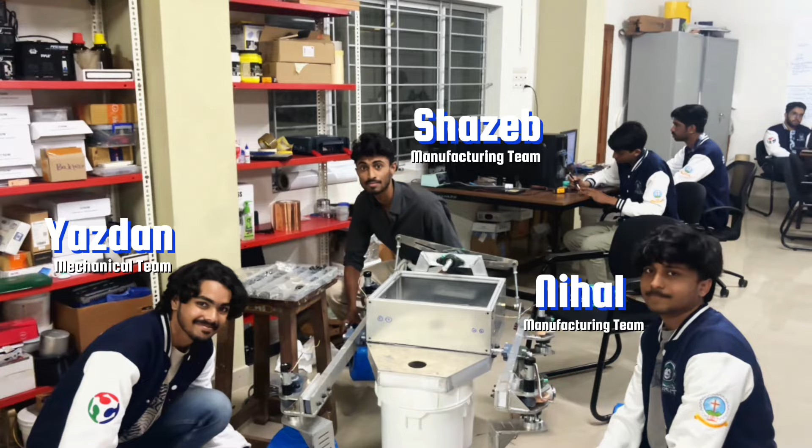Meet George, our hardware lead. Say hello to Alfred and Matthew, our rover controls and automation team. Here's our manipulator team, Rishtan, our rookie designer, and Devika and Albert, who handle the manipulator controls. The drone team, Tejas, Mufsir.

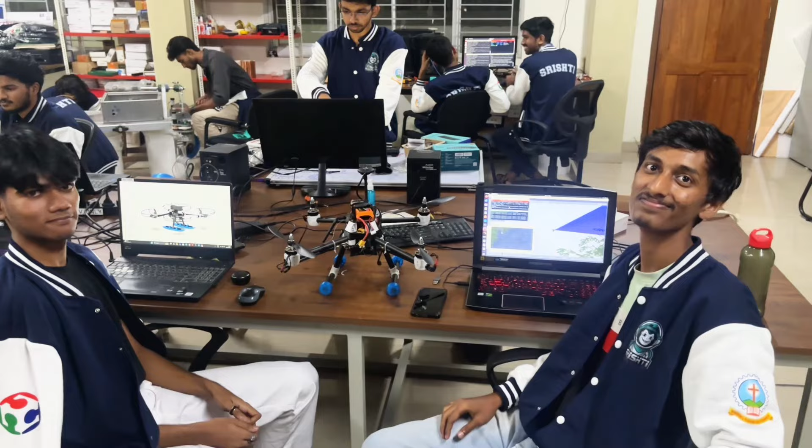Meet the communication team, Anita. Introducing the science team, Vismaya and Nital. And finally, this is our administration team responsible for media, marketing, and documentation. The team structure consists of 9 primary sub-teams subdivided to optimize workload distribution and enhance development speed.

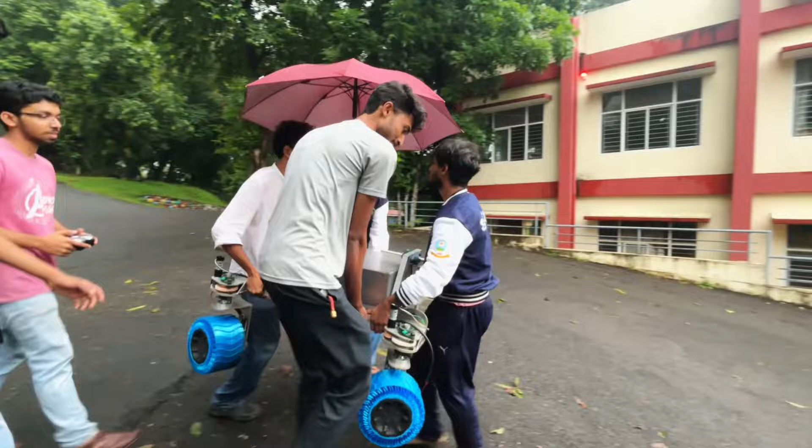Currently, with 30 dedicated members and the unwavering support from our college, especially our faculty advisor, Dr. Bose Matthew Jose, the principal of our college, and our sponsors, we are empowered to learn, explore, and build without hesitation. Here at FabLab, we carry on what our pioneers began to finish and accomplish feats that students at our college once thought impossible. After rigorous rounds of learning and testing, passionate students joined Srishti to carry forward our mission.

Now, coming to the real question, why ERC? Well, it dates back to an event in 2023 where Team Horizon from CUSAT made the headlines, being the first team from Kerala to participate in the European Rover Challenge. This showed us a dream we hadn't dreamt before. Now, to ignite a similar fire in the hearts of students coming from a society where prejudice is harsh, we'd like to prove that a tag cannot define us, a mere number cannot put us down.

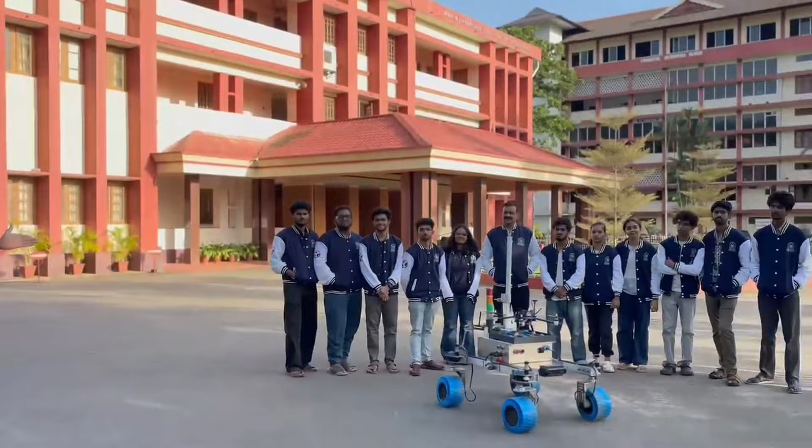And what better chance than the European Rover Challenge do we have? It's not just a competition, but also an opportunity to test our innovation, grow through collaboration, and push our boundaries. Now that is Team Srishti, built on a legacy of resilience and passion, here to rise up to the challenge.

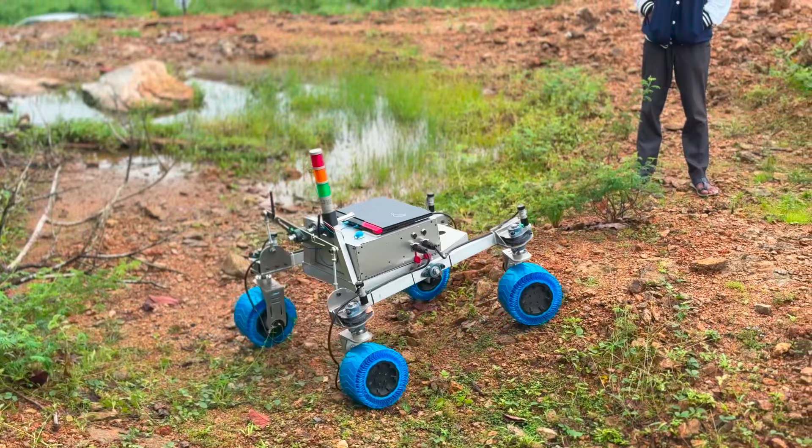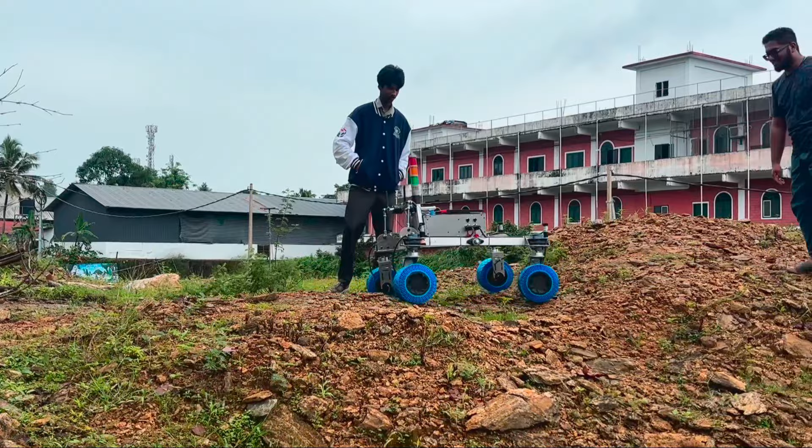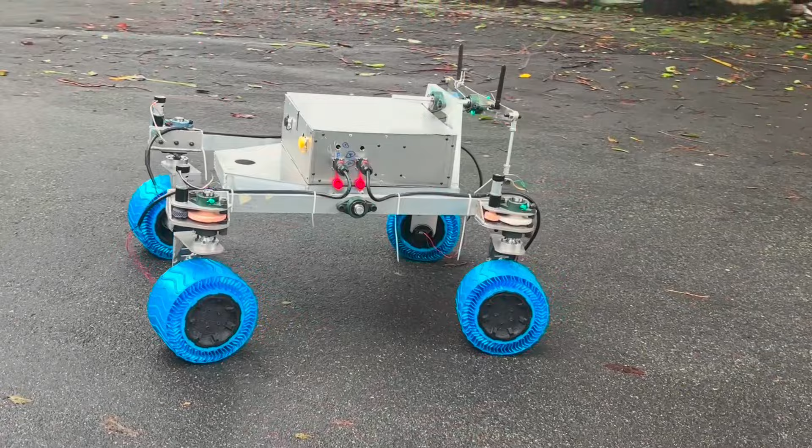Their radially spoked structure boosts shock absorption and load support. To further refine our tires, we added fatigue testing and thermal modeling to our static FEA. The 6061 aluminum chassis is compact and modular, with a space for seamless integration of electronics. It also supports the robotic arm and science module payloads.

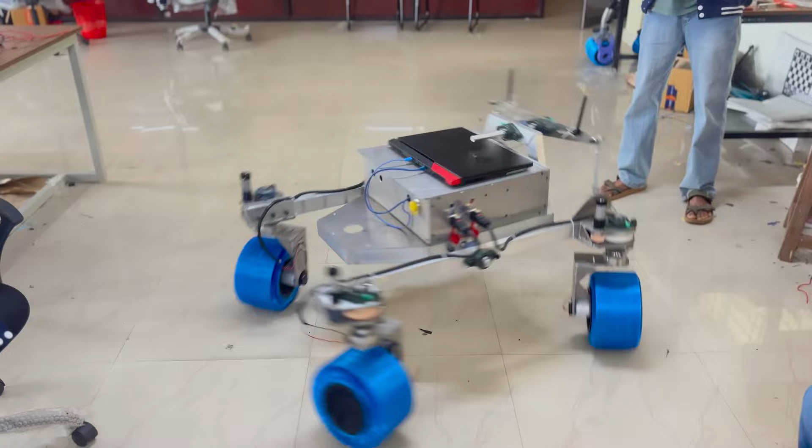Our rocker suspension system incorporates swerve steering with a robust track with base steer drive package for advanced maneuverability. And coupled with position and velocity feedback, this creates a responsive and seamless drive system. Our rover supports multiple steering modes, including Ackerman, in-place rotation, and omnidirectional steering.

Prana is powered by a Ryzen 9 processor with a 1650 Ti GPU through an onboard laptop running Ubuntu 22.04 and ROS 2, enabling us access to the latest packages and enhanced functionality. The rover is controlled by custom-made PCBs driven by Teensy microcontrollers, interfacing with sensors, motor drivers, and the onboard laptop.

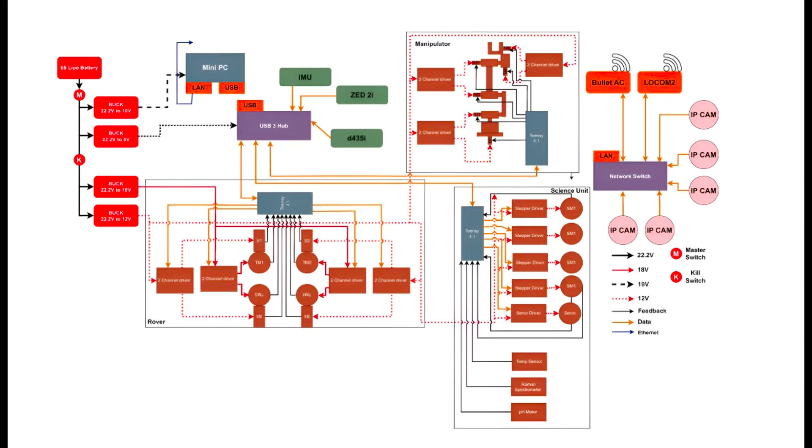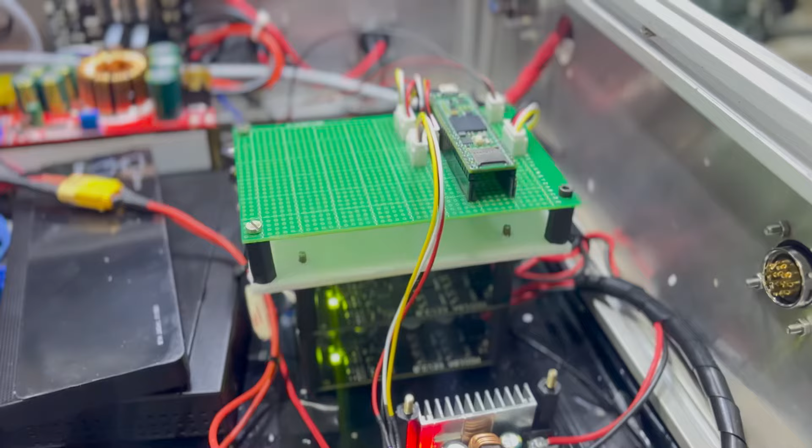A hub and switch is used to enhance the interface availability. We have mounted a tower light to visually communicate the rover's operation states. Our drivetrain uses planetary geared heavy duty encoder servo motors to deliver the required torque efficiently. The motor drivers are stacked for a compact layout and enable variable speed control.

The onboard kill switch swiftly addresses the emergency situations. Our modular battery system allows us to isolate and replace power packs independently.

Our rover performs 3D autonomous navigation using ROS2 and mesh navigation stack. Localization is achieved using ZED 2i and IMU via ORB-SLAM3. The CVP mesh planner uses terrain-aware cost maps for precise path planning, while PlanSys2 manages high-level task execution and recovery

behaviors. We have also developed a Unity simulation for high-definition visuals and more detailed rendering for visual odometry and data collection.

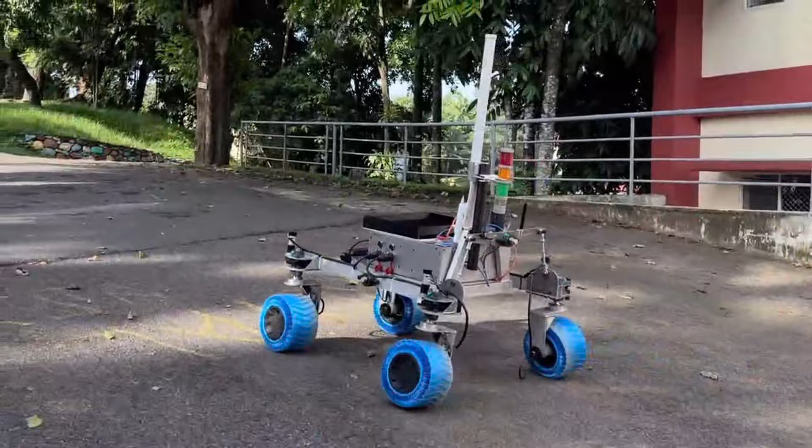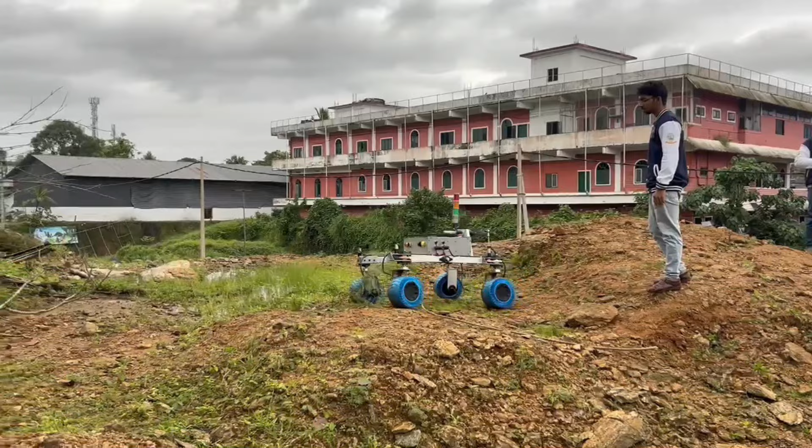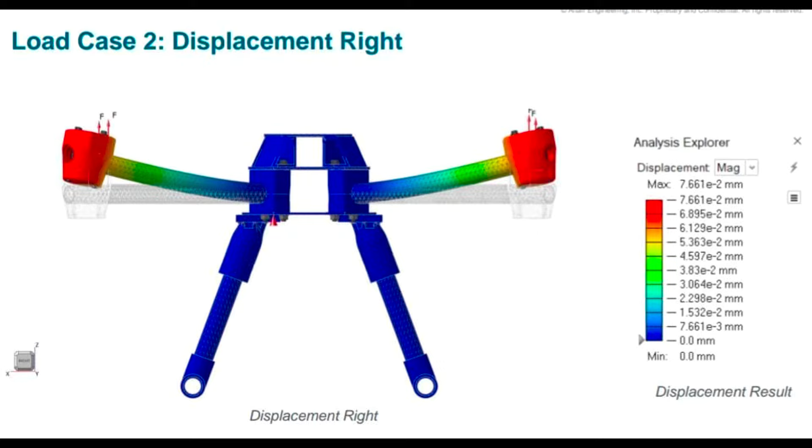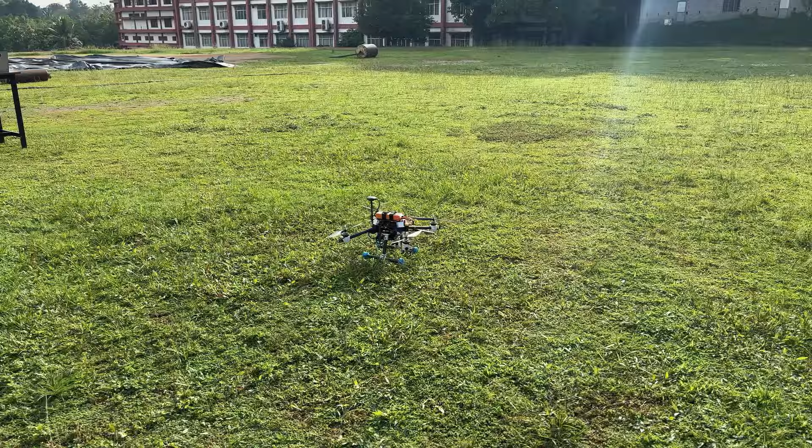Propeller guards enhance safety and protect the components, while the central body houses the electronics and payload in a compact, optimized enclosure. Sea Cooper features high-thrust, low-KV-rated motors powered by a 5000 mAh battery, with a powertrain optimized for a sustained low-altitude flight. Dual M10 GPS ensure the reliable localization and surveillance.

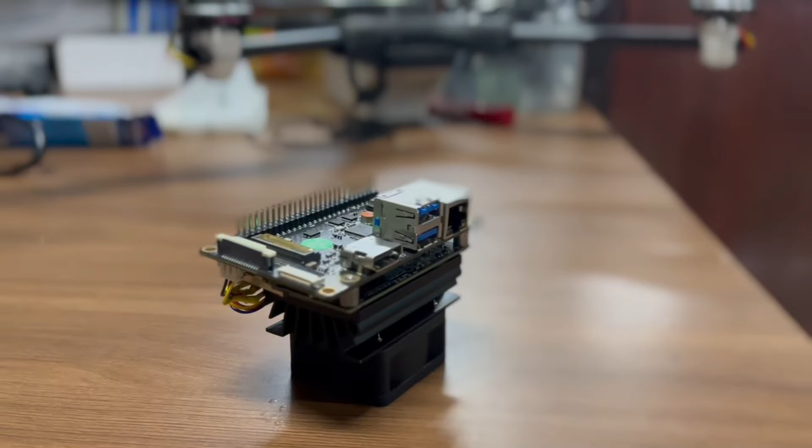For precise stability even under the low GPS conditions, we use Holybro H-Flow optical flow sensor. Probe detection is performed using the thermal cameras powered by a Jetson E203 carrier board. Long-range communication is ensured via SIYI HM30 system, all coordinated by the Pixhawk controller.

Sea Cooper navigates a 10 by 10 by 4 meter cage using the QGC defined paths, while ROS2 handles real-time processing. The YOLO-11 algorithm detects the probes, aligns the drone overhead, and logs the GPS positions. And once all the probes are marked, it automatically lands on the ArUco 102 target.

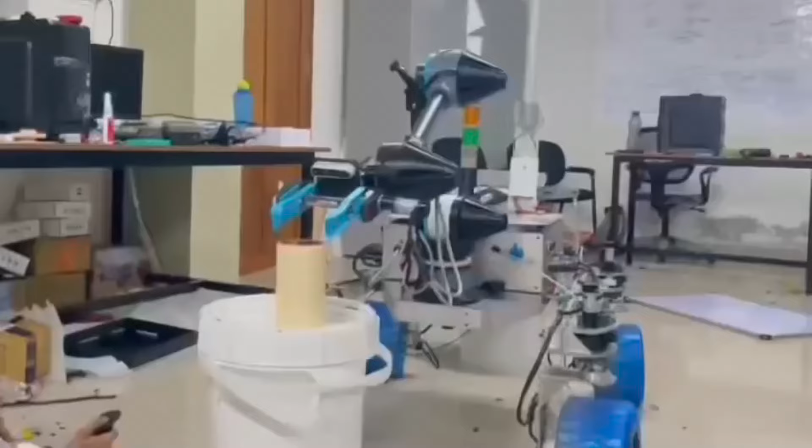The rover is equipped with a dexterous 6 degree of freedom robotic arm with 5 revolute and 1 prismatic joint. 3D printed planetary gearboxes are used to increase torque output with minimal slip effectively. The manipulator employs 3 two-stage gearboxes with a 9:1 gear ratio and a 1-stage gearbox with a 3:1 ratio.

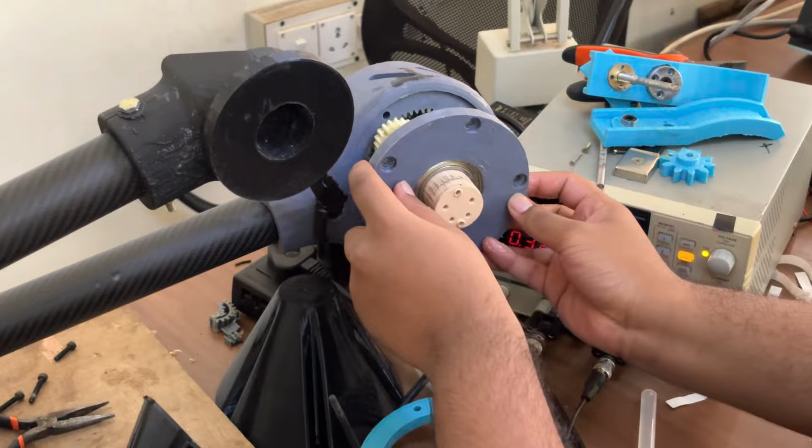The end effector features a custom designed 3D printed 2-finger modified parallel jaw gripper with prismatic movement enabled through synchronized parallel lead screws. RealSense D435i depth camera is mounted on the end effector to detect objects and estimate their position effectively. The manipulator uses YOLO V8 OBB model to detect objects with oriented bounding box and move it for motion

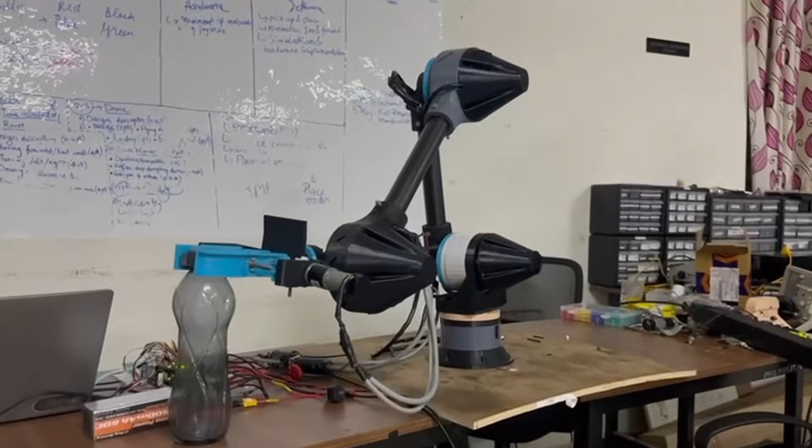planning. The manipulator is controlled using the joint trajectory controller available in ROS2, and internally each joint is controlled by a PID controller. Manual controls are enabled through Logitech Extreme 3D Pro joystick.

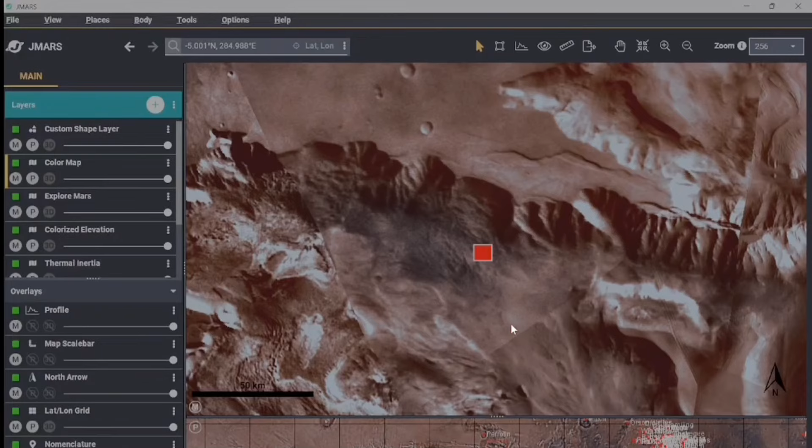This year, our science team has a geology-centric focus with our current study on various minerals being grounded in past astrogeology research papers. We employ JMARS and USGS platforms utilizing CTX and high-res imagery for detailed mapping and analysis, and we are currently learning to use QGIS, an open-source platform for map creation.

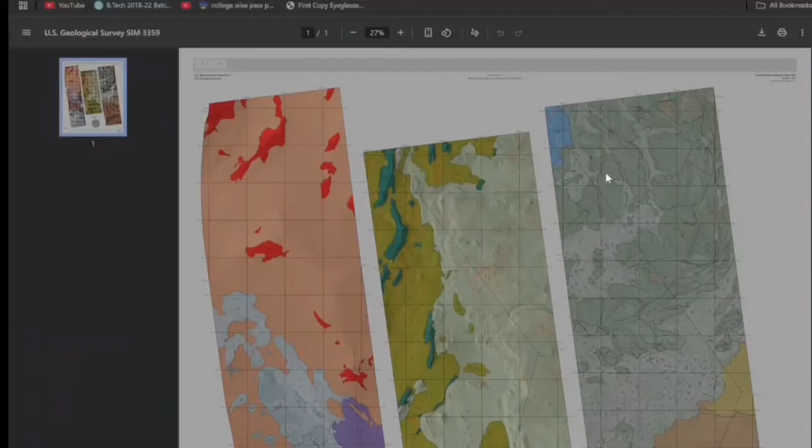Alongside the geology analysis, the chemistry team is diving into spectroscopy using the college spectrophotometer as a learning tool to further implement the Hamamatsu C12880MA on Prana for real-time analysis.

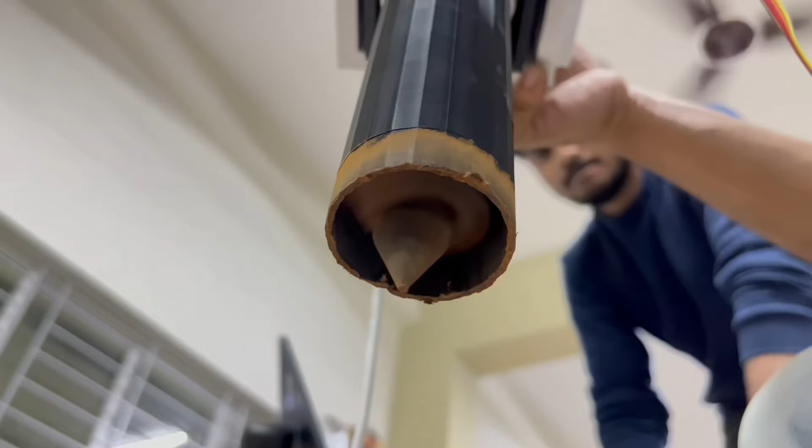The sample collection unit is designed to collect a deep sample 30 cm below the surface and a surface sample. Our 3-stepper motor-driven auger drill system works in a 4-stage process: approach, drill, retract, and reset. Alongside this, a servo-actuated rectangular scoop gathers surface regolith. Once in reset, both samples are deposited in a customized, isolated, high-precision load cell-equipped container for weight measurement.